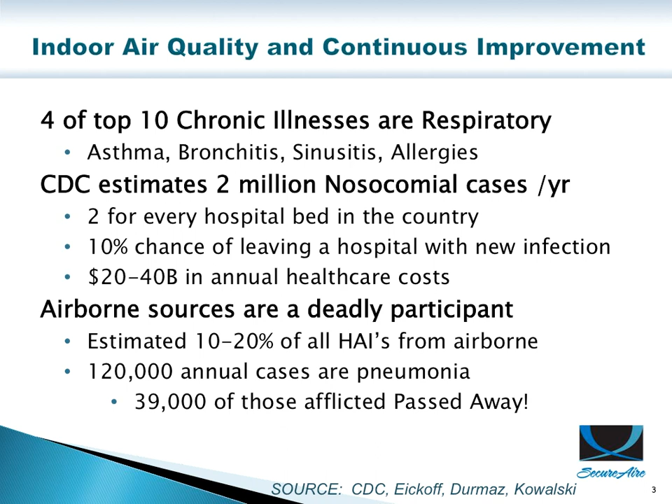So the question is, are airborne sources a participant in hospital-acquired infections? The estimate for that is somewhere around 10 to 20%. However, the biggest airborne transmitted disease in healthcare is actually pneumonia. If we look at the annual cases of pneumonia reported in hospitals, it's roughly about 120,000, and typically about 1/3 of those patients actually perish. So I think the bottom line is, if you don't have to go into a hospital, don't.

Let's move on to small particles, transport mechanisms, and how they actually tie into ASHRAE's 52.2. If we think about small particles in a cubic foot of air, we roughly have about 3 million particles less than a micron in size in a cubic foot of air.

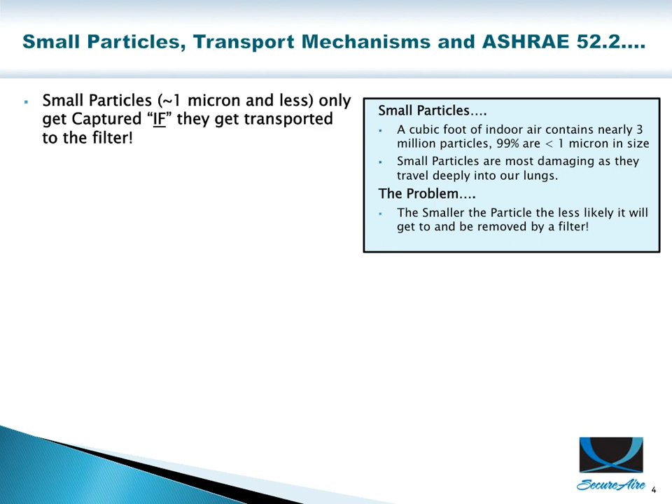Yes, that's definitely a big number, and the reason to be concerned is that small particles are actually the ones that get deeply entrained into our respiratory system, and if they're bad actors, can cause us a problem. The issue with small particles is that the smaller they are, the less likely they are to actually get to a filter. So particles less than a micron in size only get captured if they actually get transported to the filter.

There are 2 major transport mechanisms that influence particles: one being airflow, and the second being electromagnetic fields. The main transport mechanism for particles 1 micron and smaller is not airflow. It is actually an electromagnetic field.

High efficiency filters - what do we associate them with? We associate them with better capture, yes, but also higher fan energy usage. And that's a direct measure of the higher static pressure.

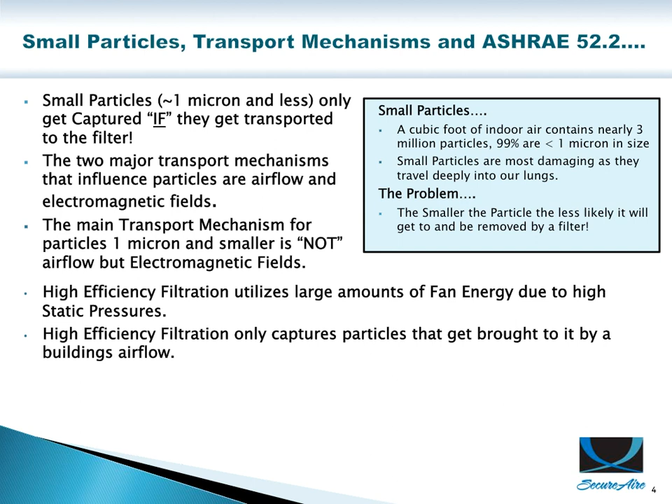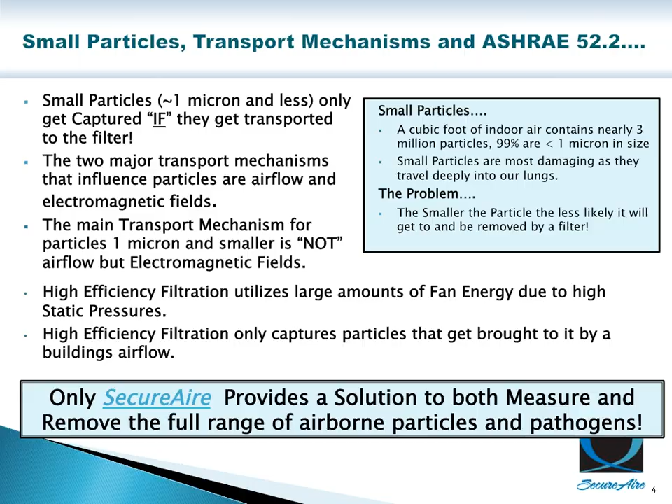Remember, high efficiency filtration only captures particles that get brought to the filter by airflow. SecureAire is in a unique position in that we can both measure and remove the full range of airborne particles and pathogens. So now let's look at that 1 micron size and see if we actually should be concerned.

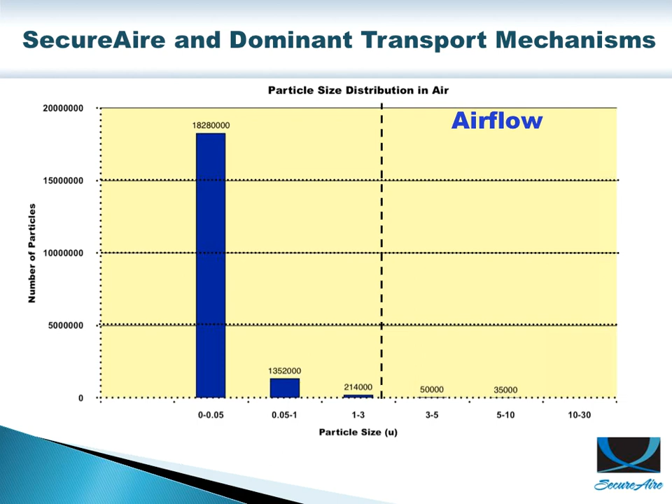What we want to do here is actually move that line from airflow to include those particles. And if we can do that, we'll have a better chance to actually capture those particles and remove them from the air.

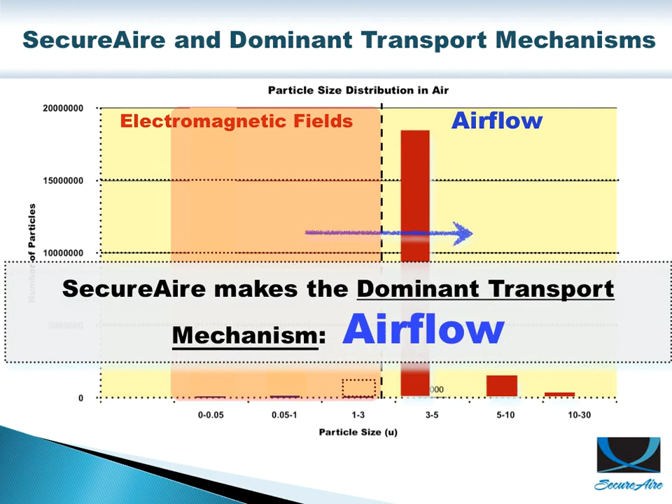So what we're talking about here is that SecureAire makes the dominant transport mechanism airflow, away from electromagnetic fields. That's a key, and that's probably one of the most important slides here - we now have a technology that can actually unlock the hold that electromagnetic fields have on those particles and actually get them into airflow so that they can be removed.

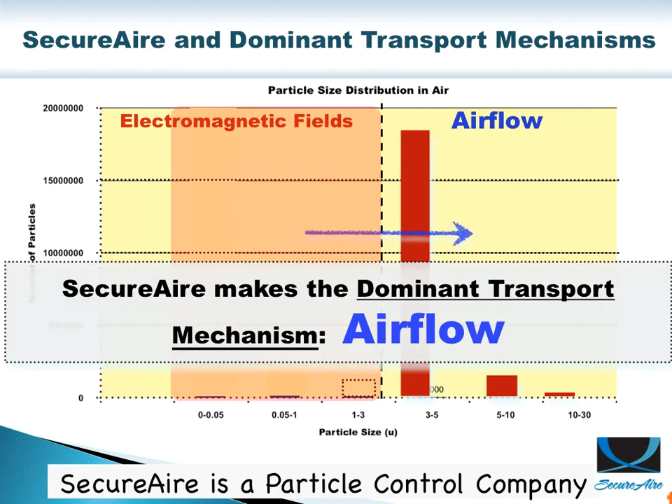If we were to look at the platforms that SecureAire offers today, we can build up our systems in an air handler, as you can see in the first depiction. The second thing is we do have an in-duct system, which is good if you're looking at just purifying the air of a room.

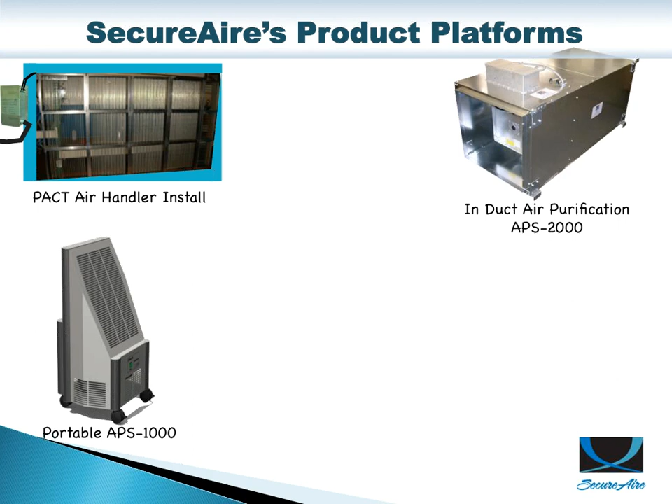We also have a portable device, which can be used in various different ways. One being, for example, if you have a remodel in a healthcare institution, that would be a nice way to keep the air clean from where the construction is going on and where the patients are. So it's a good insurance policy from an air perspective.

The other thing that SecureAire has is actually an air quality monitor. It's a very simple device that can measure the amount of particles in the space where you are. And that's very important because we're not looking at the quality of the air inside the air handler - we're actually looking at the quality of the air where we are in the room. That's really what we need to be most concerned with.

Another platform that SecureAire has is the ACS system, which is a single-pass, high-efficiency device that, in fact, has the ability to kill whatever's being captured.

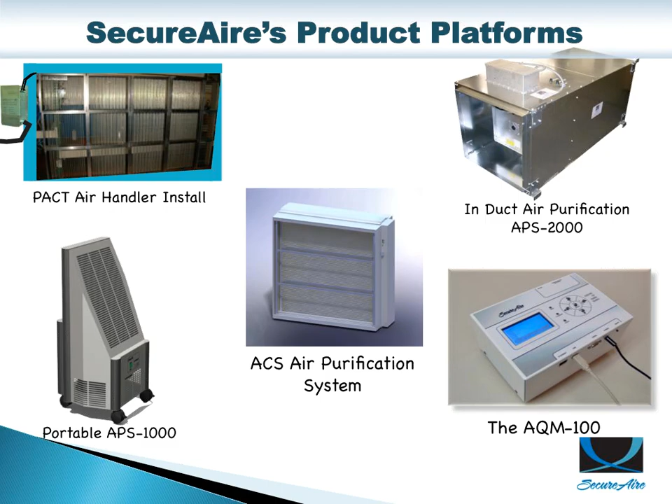So, to go into a little more detail on some of these product platforms, first, the AQM100 Air Quality Monitor. Again, a very easy device to operate. It can help monitor the levels of bacteria, viruses, and any other contamination that's potentially in the air.

Just some of the features - a very easily read LCD display. It measures down to 0.4 microns, and that's very important. That 0.4 micron channel is actually the small particle size on ASHRAE's 52.2 test, so we're actually getting the most challenging particle size for that test. That's a key feature of the monitor.

Again, very easy to operate, connection to a standard wall outlet. You can communicate via a number of different platforms, download the data. It's a very good device, and more importantly, it provides you the ability to have not a third-party test, but actually a first-party test, because you can test it right there, resident in any space. Very easy to use.

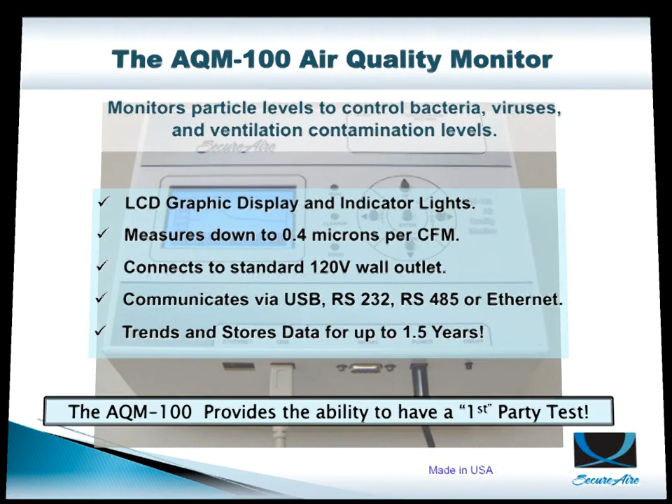So the SecureAire technology is based on very simple properties. What we found in the past is that if you can't explain it very simply, then it's just not easily understandable.

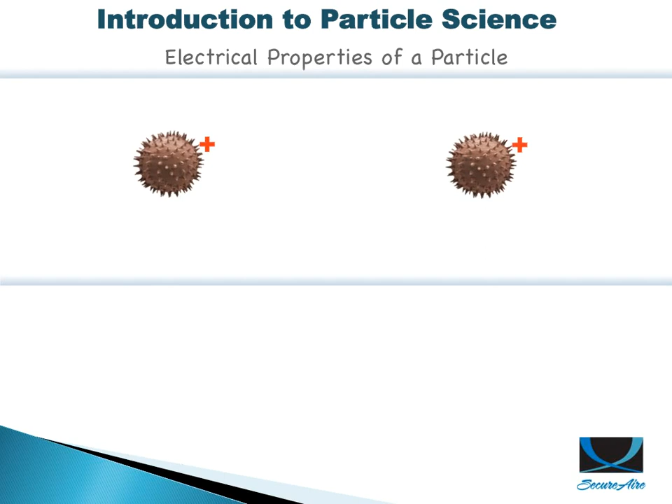What we're trying to do here is to show you that from a particle science perspective, likes repel - basically 9th grade physics - and unlikes attract. That's the basis for the SecureAire technology. We want to harness those two simple principles to actually get us to a dominant transport mechanism being airflow.

From a PACT perspective, PACT does two very unique things. The first thing it does is that it actually conditions particles and makes them want to come together.

So if you have positive and negative particles, you want to make them come together and become larger. The second thing it does is force the conditioned particles to collide. Once you get particles to collide and attach, they're held together by ionic bonding, and it's very difficult to get those particles away from each other.

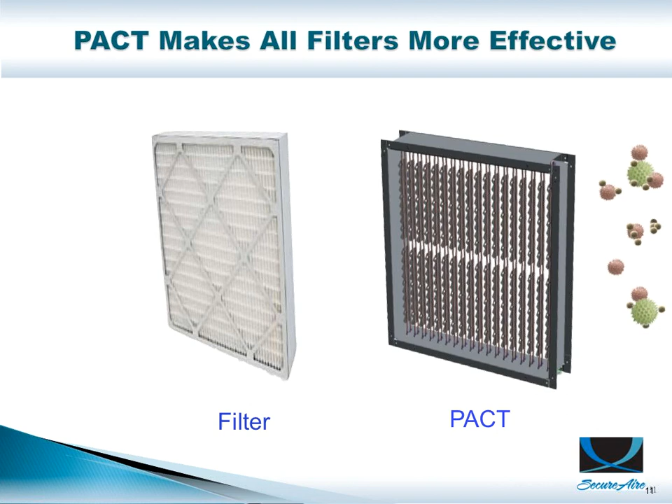So more simply, PACT is a device that makes every filtration device more effective. If you look at the slide, a standard filter takes some particles out, and some, of course, get through. If we put a PACT system downstream and use those particles getting through, we agglomerate them via electric charge, and they come out of the PACT system in a neutral state. That's important, because when neutral particles go back into a room, they attempt to break down the electrical charge of smaller particles, and they absorb what's in the room, making them larger and therefore easier to remove.

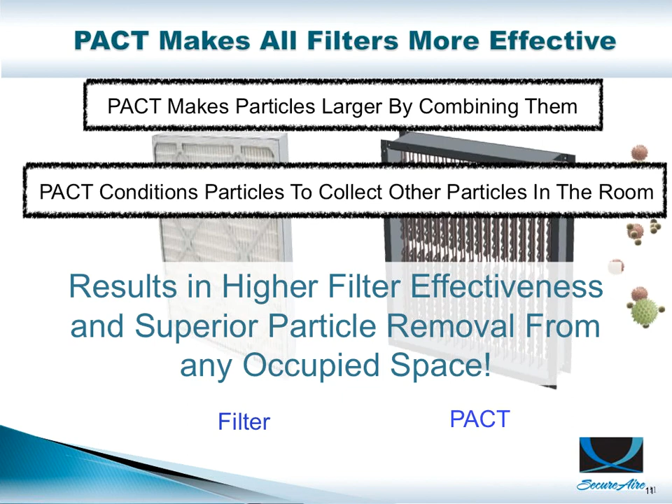So we basically take an ordinary filter, add a PACT device, and we make that filter better. The question is, how much better? Well, depending upon the filter and the application, we believe somewhere between 3 and 6 MERV ratings, which is significant. Frank, what is the pressure drop?

Frank, what is the pressure drop through the PACT system? That's a very good point, Mike. The pressure drop through a PACT system is actually virtually zero. We've measured it down to 0.02 inches of static. So from an additive sense and from a fan horsepower standpoint, it's actually negligible.

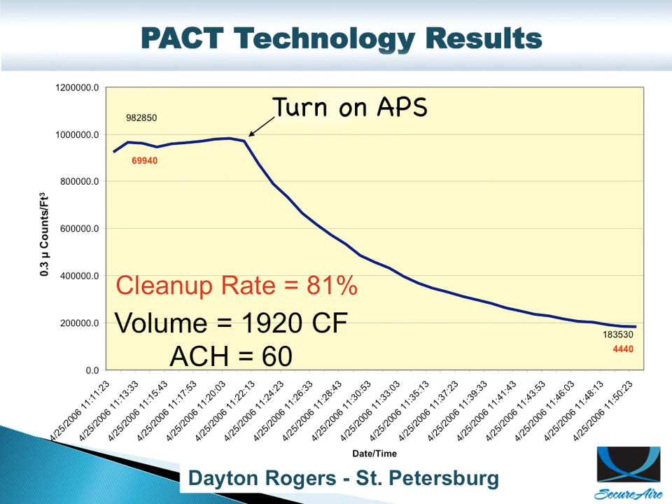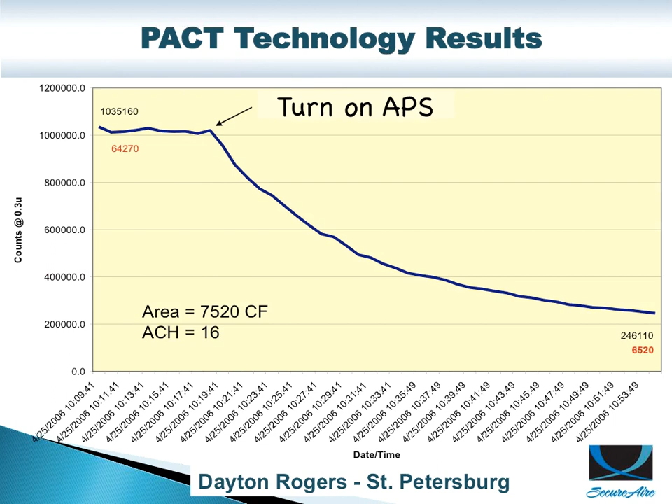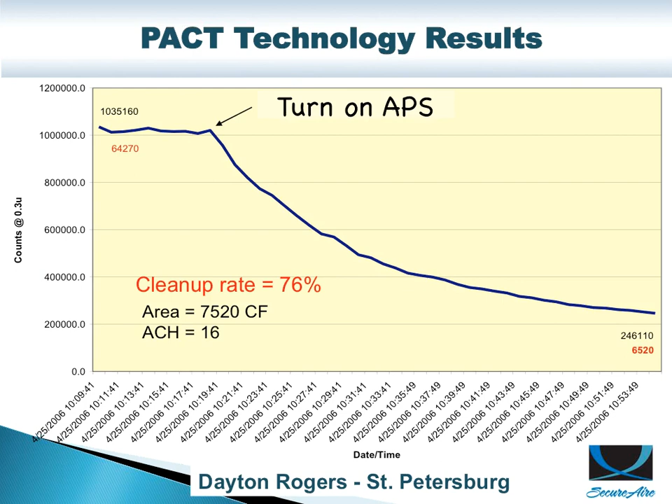Now, of course, you would say, well, that's a very high change rate from an air perspective. So what if you had a bigger room? Well, of course, we looked at that. We looked at a room that's basically 4 times the size, and we cut the air change rates down from 60 to 16. And lo and behold, roughly the same thing happened. So what we know today is that the PACT technology is very effective in the recirculating air room mode. It works very, very well.

So now, a little more data. We had an interesting case study at the Lake Tahoe Surgery Center where we were looking at the removal of particles. As you can see in the graph, the red is the system without the SecureAire, and the blue is the system with SecureAire. We basically knocked down a lot of the particle intrusions that were occurring in the room. And this actually was a third-party test, so the surgery center actually hired someone from the outside to perform the study.

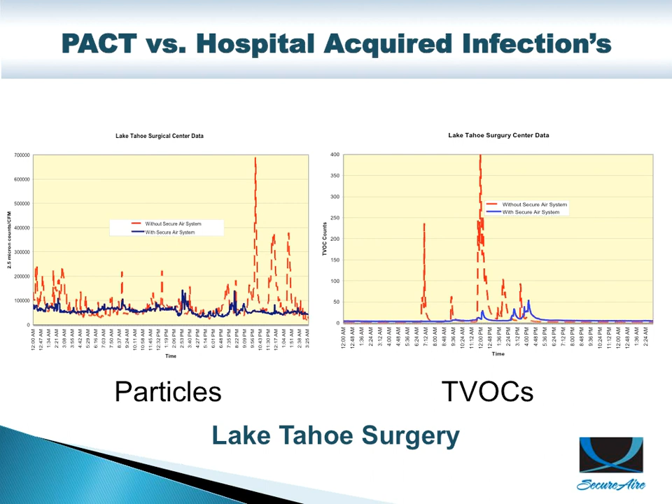Now here's where it gets really interesting for us: TVOCs. We actually weren't aware that they were looking at the measurement of TVOCs. And we were very surprised and happy to see that not only are we now affecting the removal of particles, but we're also affecting the reduction of TVOCs. That's pretty important from a quote-unquote filter device perspective.

And we actually got a letter of testimony from the head surgeon at the center, and while they had low hospital-acquired infections prior to the date of the PACT system install, they went to 0. And they held 0 for a little over 3 years. 0 hospital-acquired infections in an orthopedic surgery suite is very, very impressive data.

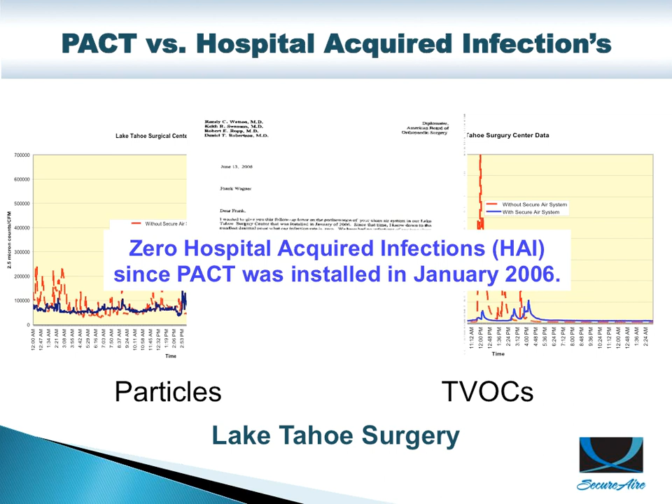So we'll take it a step further. The same surgery suite in the summertime had a number of forest fires. And all during those forest fires, the surgery center basically had no effect of smoke.

Now, as the story goes, there was also the Lake Tahoe Hospital, and when the fires were going on, they had problems in the hospital. So what happened was the hospital actually called the rep that had the PACT system installed in the surgery suite, and they were asking him why the hospital was full of smoke. And his response was basically, well, your hospital is full of smoke because you don't have the systems in the hospital, they're in the surgery suite. So it was nice to get another additional data point on the PACT technology from the perspective of not only is it effective on particles and TVOCs, but we've now added smoke.

So again, a little more data and support for the PACT technology. IBM in Silicon Valley basically went for a recent build-out of a building, and they applied for a LEED Gold status. The problem is that when they went into the building to check the air quality, they didn't meet any of the maximum allowable concentrations for LEED. And that was for formaldehyde, particulate, TVOC, 4-PCH, and carbon monoxide.

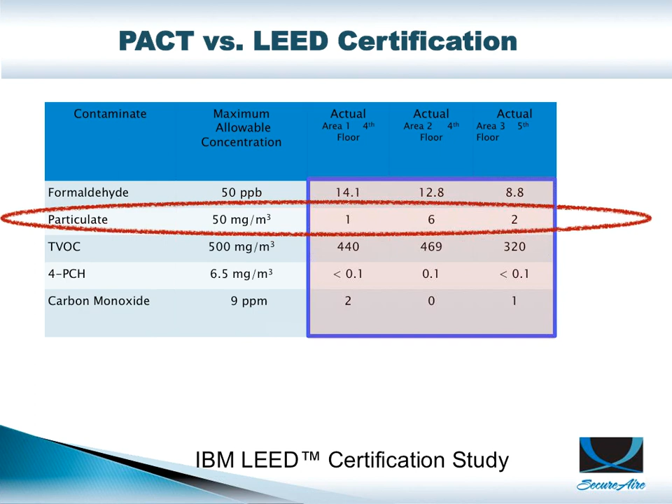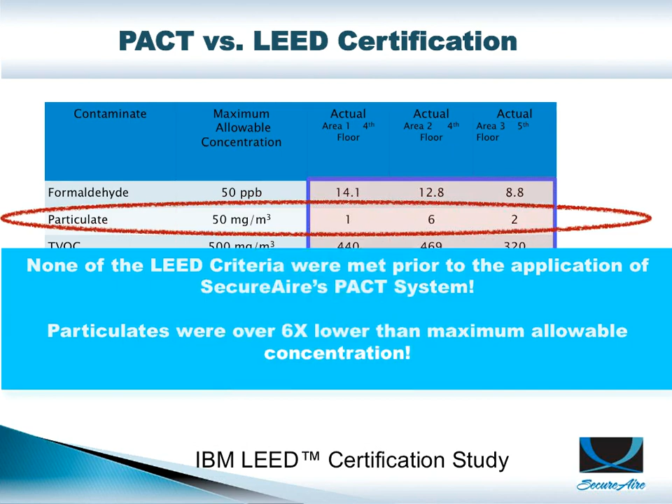So what happened was, because none of the criteria could be met, rather than go through a 2-week 100% outdoor air flush of the building, which, by the way, was not practical considering this was midsummer, what they did was employ a number of portable PACT systems for 3 days. And after that implementation, the third-party testing facility went in, took the air samples, and very successfully reduced all of those categories and got the certification for IBM. Again, just further added support that the PACT technology is not only unique, but in fact it works very well.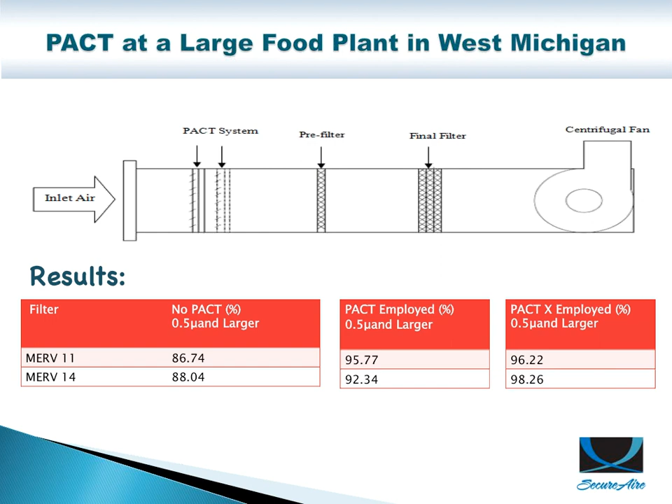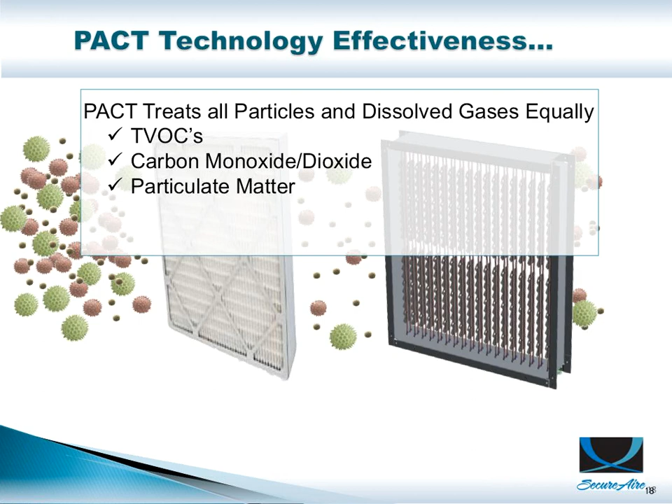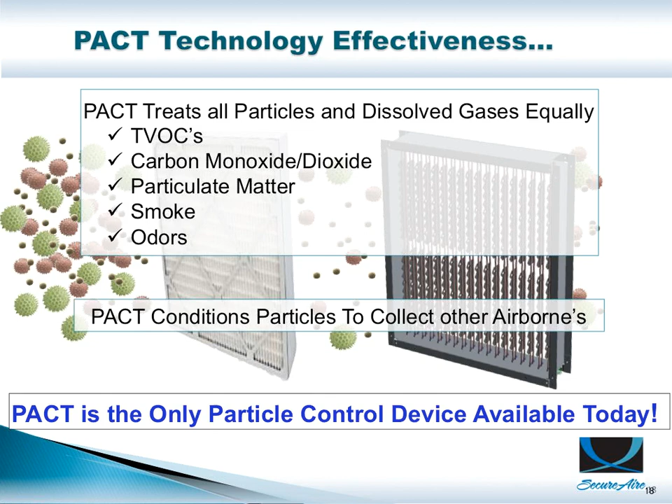So just a summary for the PACT technology itself. PACT basically treats particles and dissolved gases equally. TVOCs, carbon monoxide, carbon dioxide, particulate matter, smoke, and odors. It doesn't care what it is. Everything gets treated equally. PACT conditions particles to collect other airbornes. PAC is basically a particle control device, and it's the only one out there on the marketplace today.

So now, Frank, what kind of footprint are we talking about? How wide is that unit, and where does it slide into an air handler? How much footprint do we need for an air handling system, for that PAC system to be employed? Okay, so for that PAC system, and remember, the real application for it is in a recirc mode. So that's really where the niche is for that technology. But if we think about how much room we need, it's basically 3.5 inches in airway length. And do you need any serviceability of that piece? That piece basically does not require service. Okay, so you can actually put it in a 12-inch compartment, like an access section of any air handling unit system. Absolutely.

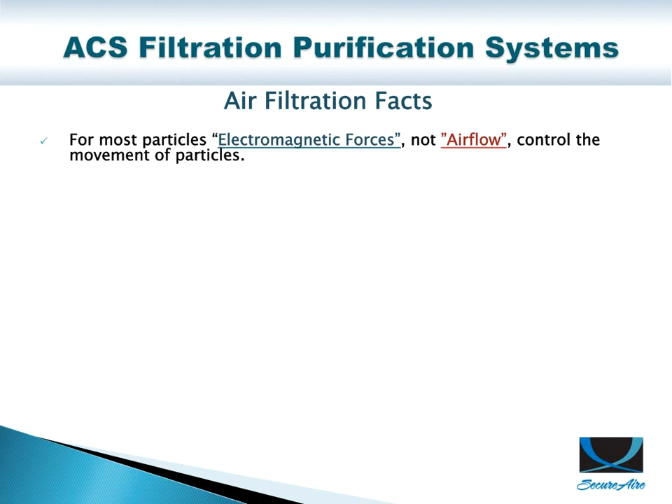Okay, so next we'd like to talk about the ACS system, which is the high-efficiency single-pass device. So we'll start out with a couple of facts from an air filtration standpoint. So basically, again, we've covered this before. For most particles, electromagnetic forces and not airflow control the movement of the particles. And again, what we want to do is convert that. We want to make airflow the dominant transport mechanism.

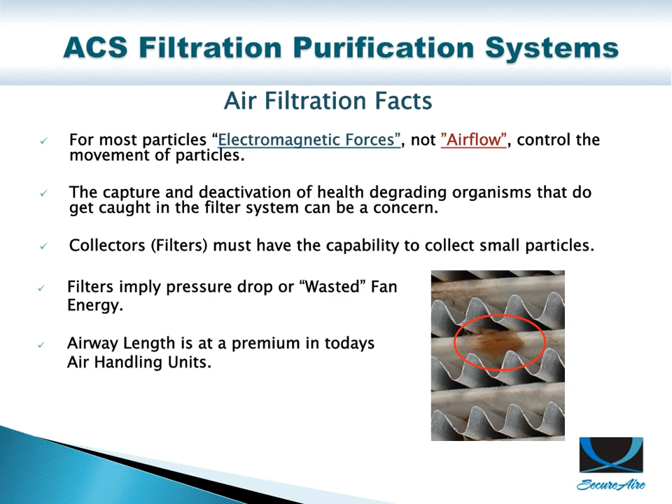Of course, filters must have the ability to collect small particles, and we want to be concerned about fan energy as well as airway length, which we just mentioned. In Secureaire's ACS filtration purification system, this device does employ similar PACT technology for a single pass efficient filter. Although it's not 3.5 inches in depth, this one is 11. But if you look at other devices that are out there on the marketplace, we're significantly smaller in airway length depth than anything else out there.

So from today's perspective, where is the ACS filtration system? It has a MERV rating of 14. It deactivates and kills up to 99% of what's captured from a biological standpoint, low static pressure, and you have the same PACT effect from particles that exit the filter. They have the potential to go in and clean up as long as there's some mixing in the air involved.

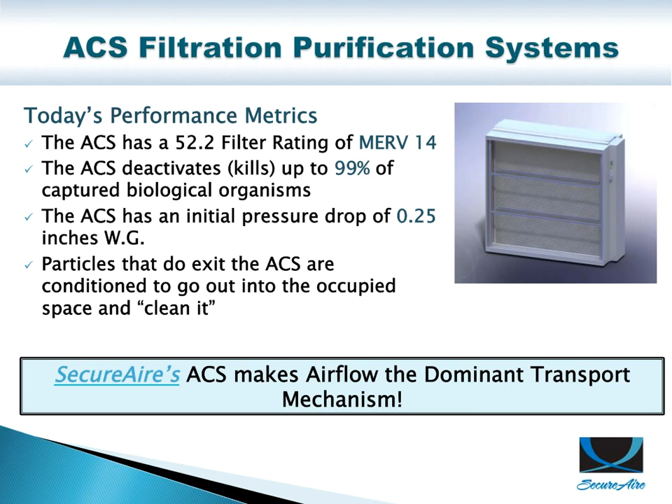So again, for simplicity's sake, and if you can't explain it easily, it's probably magic or unexplainable. But with the ACS system, we basically do three things. We use the charge behavior model that we talked about earlier, unlikes and likes. So we're using charge to help particles get bigger and to remove them. We also use here polarization. And polarization is just basically making particles become more attractive.

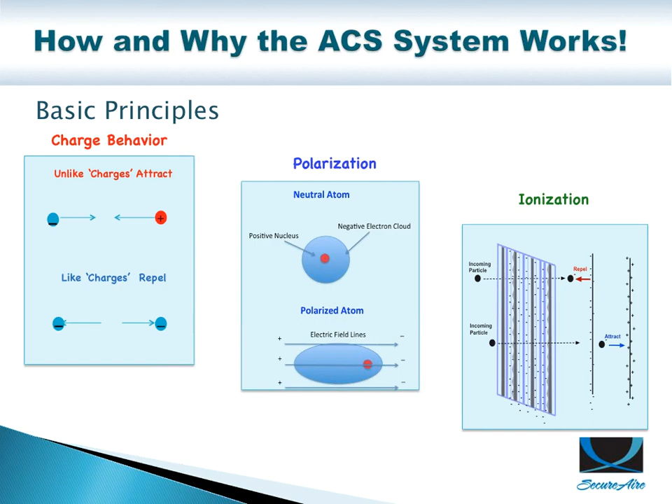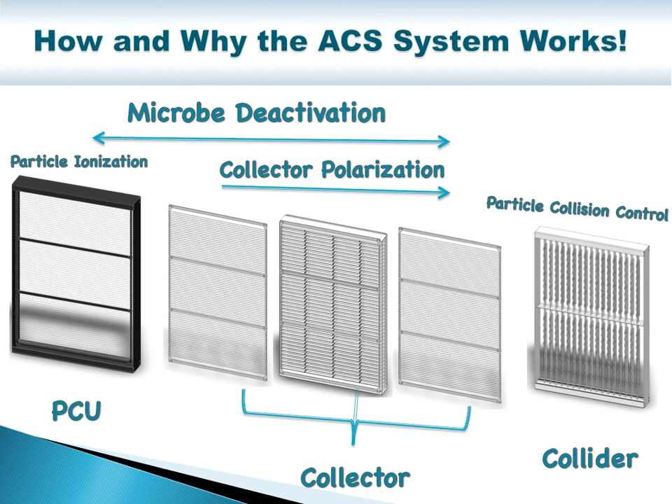So if we just look at the PCU first, it basically ionizes incoming particles. And we do that basically with charge. You can have positives, negatives, and neutrals. And typically what we want them to do is to all come out of the other side with a negative charge.

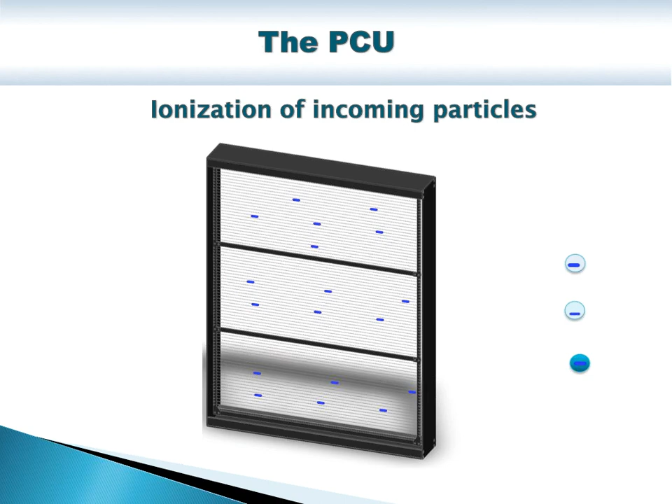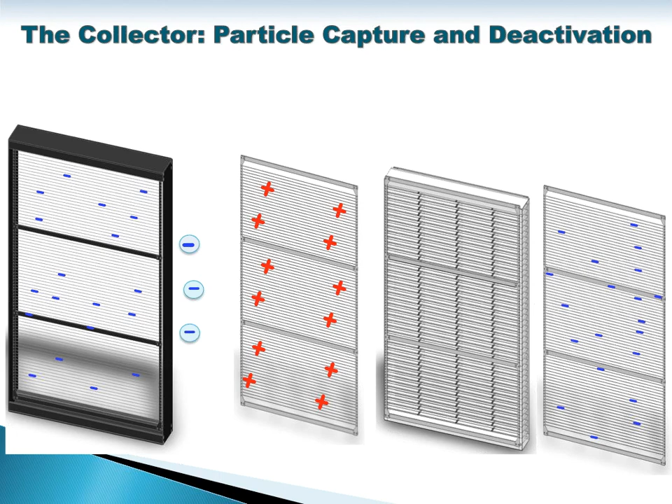The collector, which is where we capture the particles. So after they've gone through the first stage, they come out negative. We then put charges around that collector device so that the particles are more easily captured. We're creating an electric field around the filter itself. We're creating a polarized field on the filter fibers in the opposite direction, which makes them stronger. And those particles will travel through, basically, regardless of polarity, get stuck to the filter fibers and become captured in that matrix.

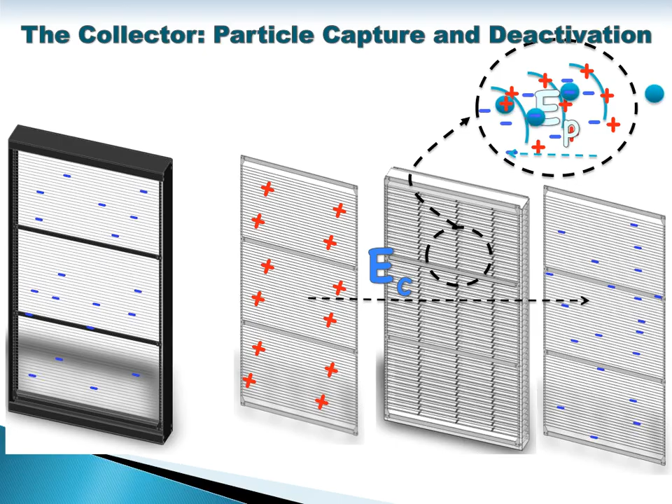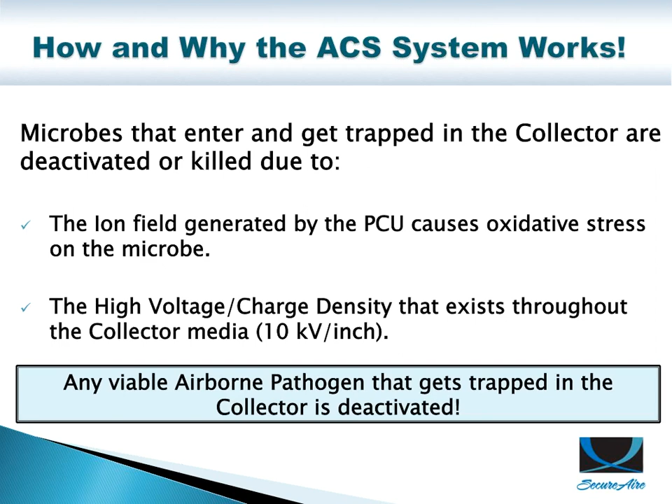We also have to remember that filters are not 100% devices, so every now and then something will get through. Now again, remember that we have fields around that collector device. Those fields are high voltage, low current, and the charge density is probably the most important thing. Charge density is the part of it that actually gives you the ability to kill anything that's viable. So that's why the system has the ability to kill.

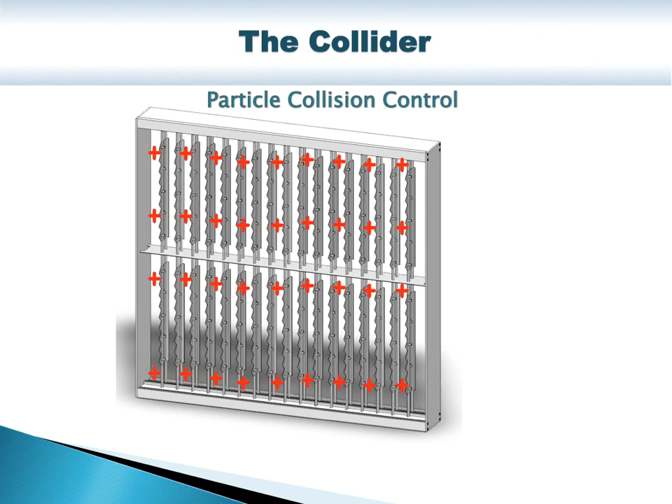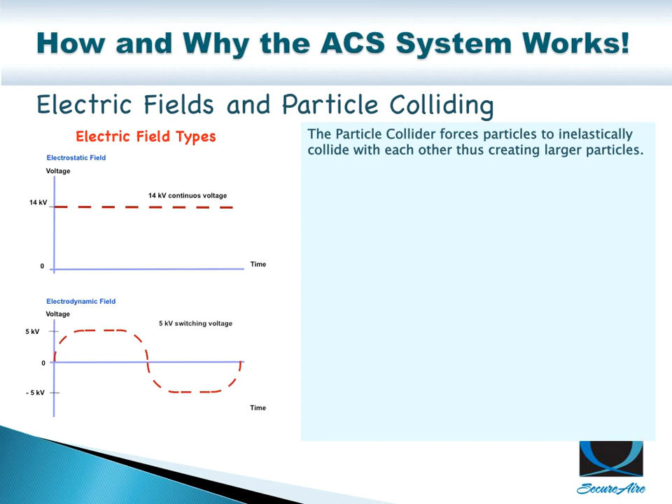Okay, so the collider is the same device as the PAC. It's just on the end of the entire ACS system. It basically changes polarity over time, and it creates that ability for particles to collide and actually get larger and therefore easier to move. We can talk about more depth here, but we're using not only DC voltage, but we're also using AC voltage. And that helps that collision process and those particles to collide and be easier to be removed.

Again, here, along with the PAC device, we don't care what it is. We don't care if it's a gas. We don't care if it's an odor. We don't care if it's smoke, bacteria, or a virus. It will work on each one of those as they look the same.

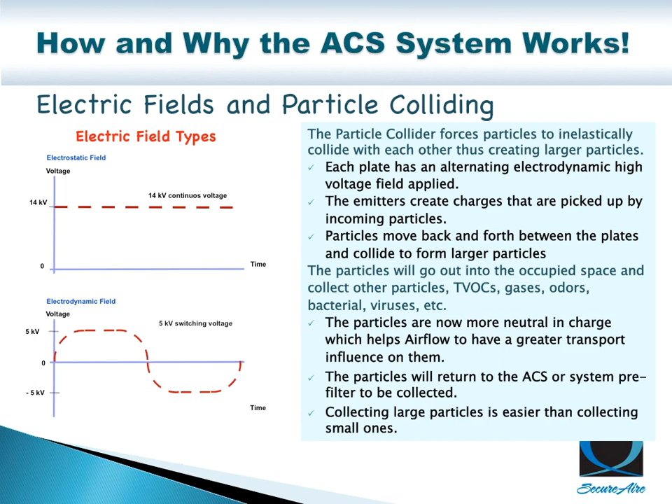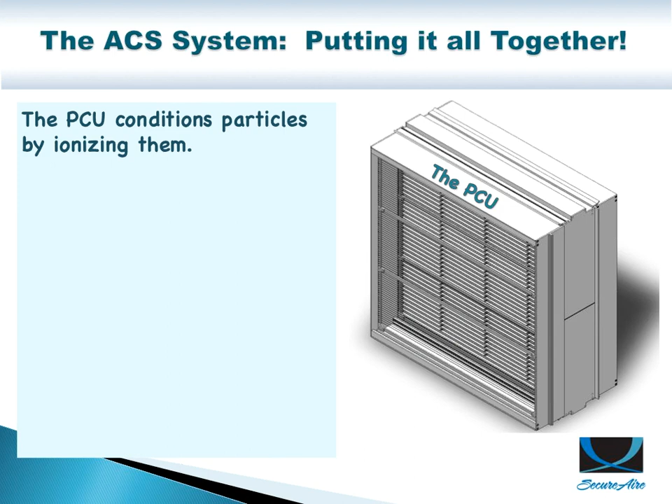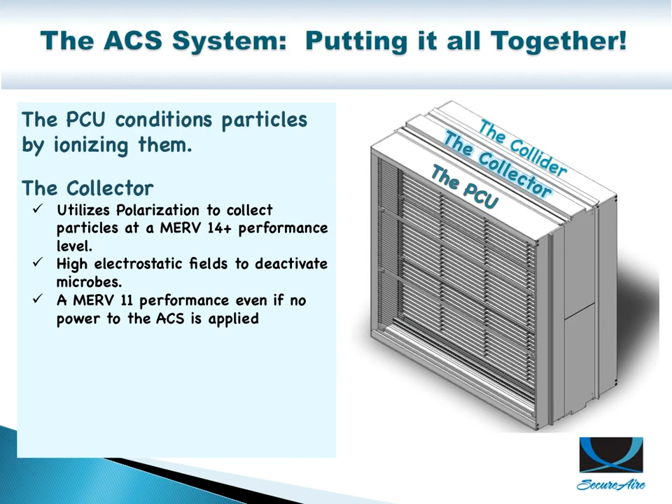Okay, so again, kind of putting it all together, the PCU basically ionizes particles that go through the device. The collector, that's the part that actually collects what's coming through the challenging air. We have an efficient filter, low static pressure, very strong fields to help deactivate, and even if you have no power, you still have a MERV 10, MERV 11 filter device there. And of course, from a last part, the collider, that is very similar to the PACT device, and it helps to make airflow that dominant transport mechanism.

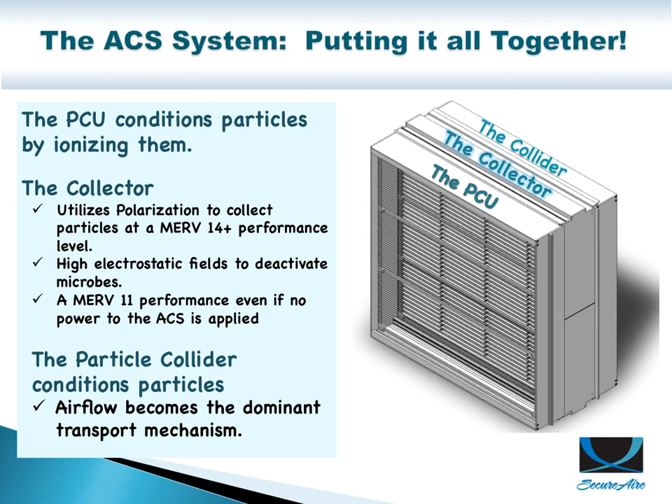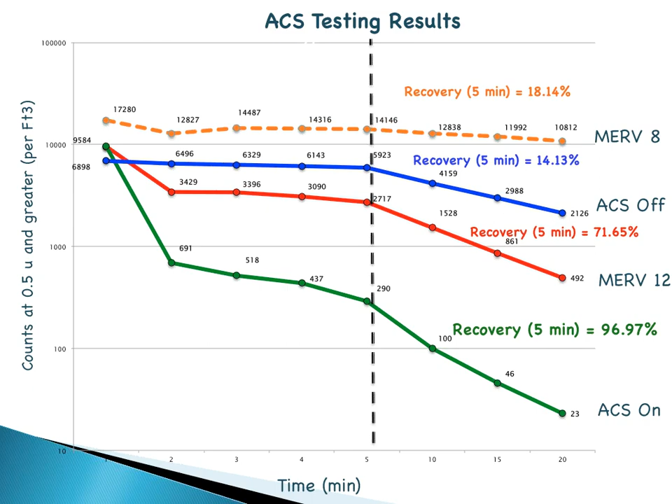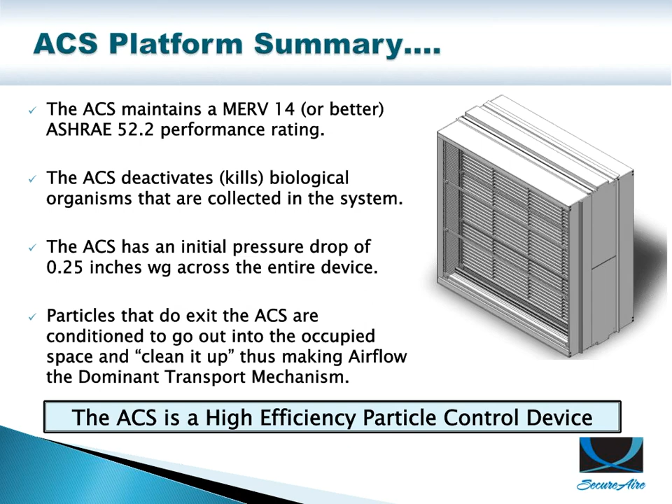So we've kind of been through the ACS platform now. It's high efficient, it has the ability to kill, low static pressure, and it has the ability to help clean up the other rooms with a return airflow. So, a couple of marquee installations that currently employ the PACT. The first is the Liberty Memorial Museum in Kansas City, where it keeps the museum air clean and all of the art that's in there.

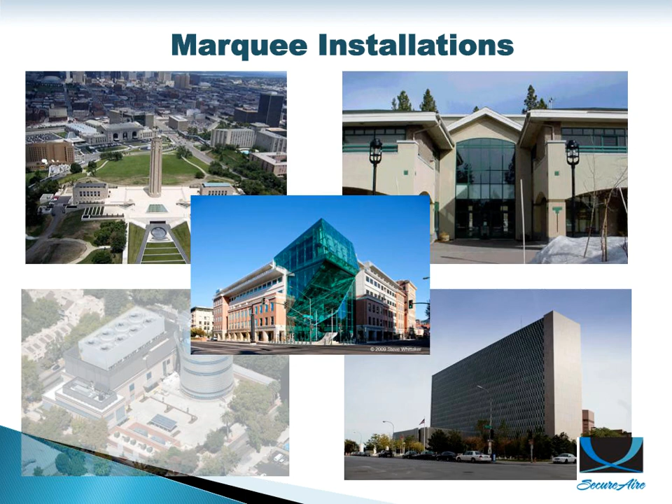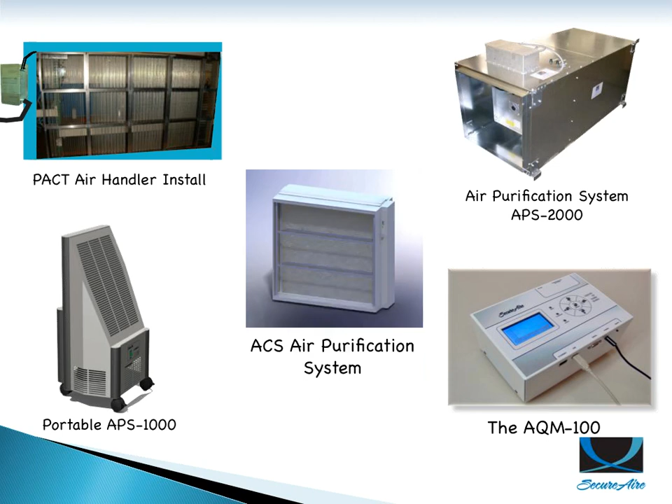So to kind of bring it full circle, Secureaire has the PACT technology. It has an induct system. There's a portable system, the air quality monitor to help validate and offer a first-party test, and the high-efficiency single-pass ACS system. And Secureaire, again, a company that provides both measurement and the ability to treat indoor air. And of course, translating into the ability to keep air handlers fan-sized correctly and efficient from an indoor air quality perspective.

Frank, one of the key things that we want to note is at TEC we've actually purchased a portable APS unit and also the air monitor. So what we'd like to do is obviously show you this in person for those folks on the line, and other members of the company that you're working with that want to see this technology work. Tell them a little bit about, we did this in our meeting room where we turned this on, and what do we do, Frank? We went from how many particles per cubic foot?

During our initial training session, what we like to do when we actually do these Secureaire trainings is have an air quality monitor there and also a portable unit. And in the case of TEC's training, I believe we registered somewhere close to 4.4 million particles on the small channel. And within roughly about 35 minutes, we had reduced that high concentration by greater than half. So just adding credence that the system absolutely works.